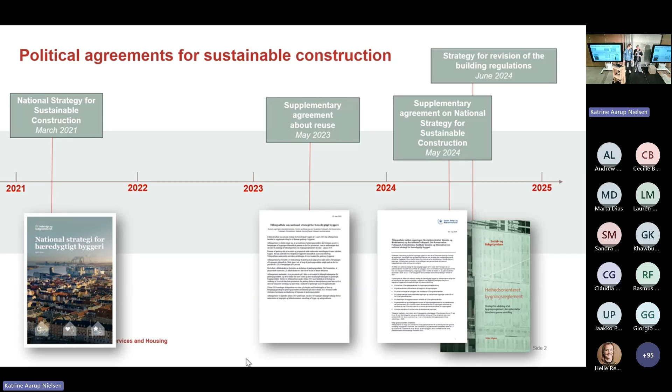So we will take a deep dive into this supplementary agreement from 2024, and Mads will start. As Nana said, we had these initiatives both for new construction and for renovation, and I will present this for the new construction, which is mainly our LCA requirements.

The agreement added a tightening of the limit values. In the first strategy, there was some stepwise tightening of the limit values, but a political agreement made the limit values even tighter than what was expected in 2025, with stepwise tightening further in 2027 and 2029.

This agreement also added a differentiated limit value based on which building typology you have. First, it was for buildings over 1,000 square meters. Now we have single-family houses, office buildings, and residential buildings - it's divided into different building types now.

Then we also added the construction process, and we have expanded the scope of buildings. Before, it was all buildings that need to fulfill the energy requirements, that need to make documentation for their climate footprint, and buildings over 1,000 square meters had a limit value.

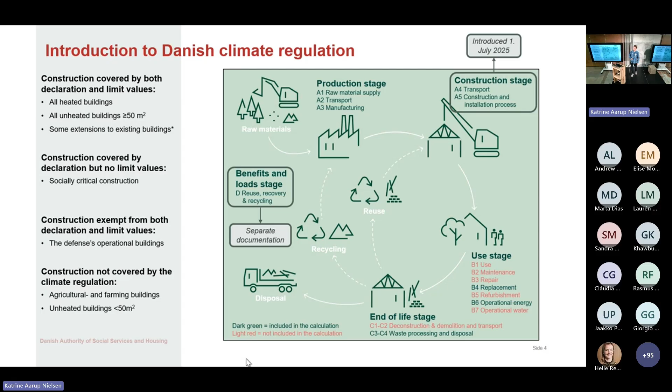This is the limit values as they look today. We have an average limit value of 7.1 throughout all building types, and you can see them divided by building type.

Then we have the construction process with a limit value of 1.5 for the construction process itself. So that's divided into two different limit values: one for the building and that process, and one for the construction process itself.

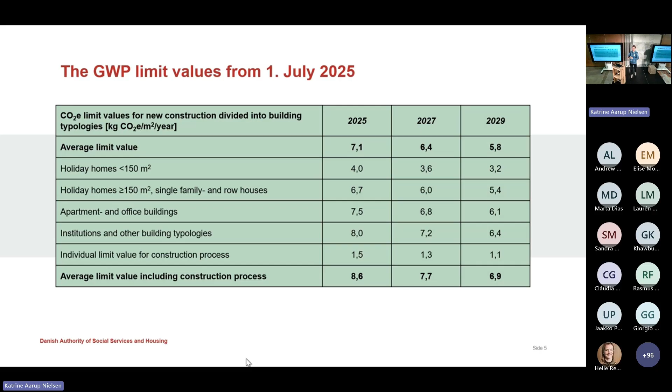Then a bit about digitalization. We have made a mapping of some classification systems mainly used in Denmark to make it easier to compare building models between programs or software used for modeling and what the requirements are in the building model.

Then we have a project that made an exchange format called LCAX, which makes it possible to convert a calculation from one tool to another and compare calculations from different tools against each other. So you can have one project calculated with one tool and another project with another tool, and then compare the calculations and the different elements in the building.

Then we have a voluntary standard for handing in the calculation in Excel, so you can fulfill that. Some tools have it included, so when making your calculation in a tool, you can just export the results in this format, but it's still voluntary today.

Then hopefully we will soon get the first steps of an analysis looking at IT architecture, how to hand in your calculation and how to store the data and analyze it afterwards.

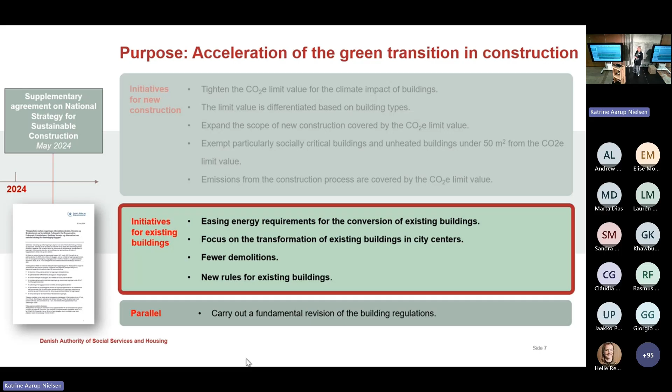There should be a focus on promoting the transformation of existing buildings in city centers so more housing can be created there, that it should be investigated how demolitions can be avoided, and that new rules must be developed to make it easier to utilize existing buildings when rebuilding, renovating, and changing their use. These new rules must be able to be applied instead of the rules that apply to new construction. This is one of the major focuses of the political agreement.

Parallel to all of this, there is this fundamental revision of the building regulations throughout the whole, quite big package that we have developed in Denmark.

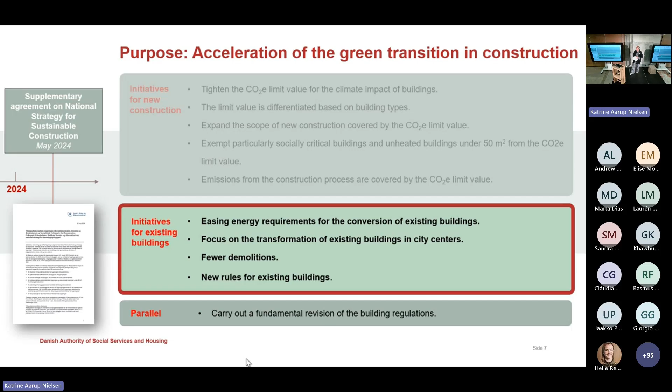With a greater focus on promoting the use of existing buildings, it makes sense to take a closer look at how we can ensure fewer demolitions in the future. At present, no legislation in Denmark grants authority to preserve a building based on climate or resource considerations.

With this project we are currently working on, we are investigating whether a new assessment system can be established where the municipality can reject an application for demolition when objective considerations make it appropriate to preserve the building. Furthermore, we are investigating if it's possible to introduce some kind of demolition fee, something corresponding to the environmental and climate impact that demolition may cause.

This is work in progress and an ongoing project that is both very exciting but also very demanding and difficult, also due to demographic changes and differences throughout Denmark. But the results are to be presented for political discussion in mid-26.

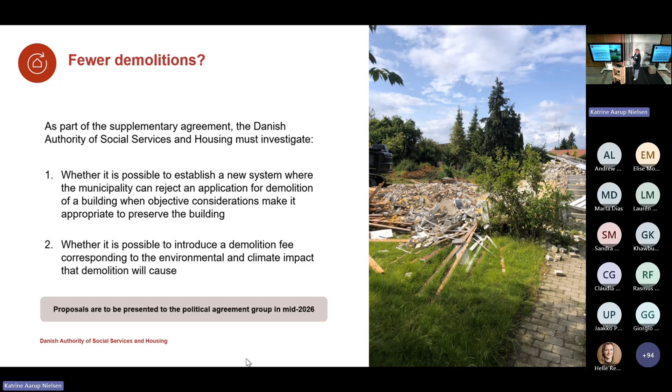Fewer demolitions talks for more renovation. This is two sides of the same coin, and because there is a focus on promoting renovation rather than demolition and new construction, as I said earlier, new rules must be developed to make it easier to use and utilize the building stock.

Before new rules can be implemented, the current rules must first be clarified. We have made a thorough analysis on how the industry experiences challenges, where they actually face big hindrances and barriers in the requirements. We have realized that there is a lot of confusion among the industry and actors about what the requirements to renovation actually are.

Many interpret the rules more restrictively than they actually are. So we are now working on clarifying the current rules so that it's clear what requirement, when and which requirements apply in renovation. We work specifically with renovation definitions to ensure coherence across the technical chapters, and to make sure that we talk about the same steps in a renovation.

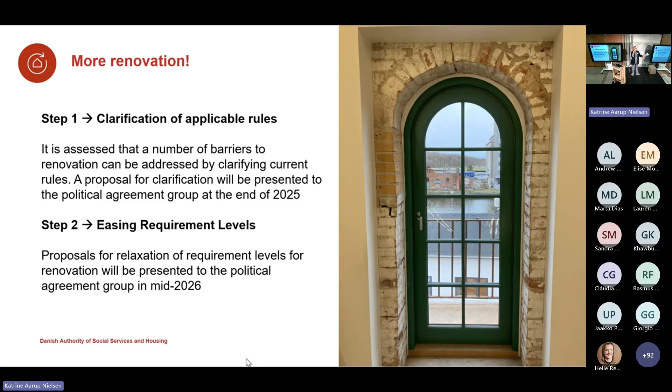This is quite an accelerating time for us, and methods and principles are to be developed at the beginning of 2026. As with the proposal for how we deal with demolitions, by mid-26 the politicians must be met with some kind of, I hope, big, beautiful catalog that we can give them.

That is actually what we have for you today. Both Mads and I will be here all day, and we look forward to more discussions when we join the table discussions. Thank you.

Thank you very much, both to Nana and Mads, for a very interesting presentation. So you can hear a lot of things are happening in the political system, next summer is very soon. So thank you very much for sharing this.

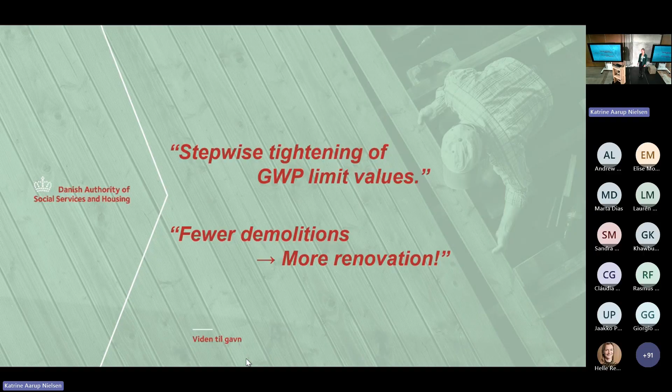We now have the last presentation from the Nordic construction authorities, and then there will be time for a few questions, and then we sum up for this part of the morning session. So the one I will now invite on stage is Elin from the Icelandic Authority of Construction and Housing, who's been working in the Nordics for a longer time, and has a lot of really interesting new information from Iceland. Please, the floor is yours.

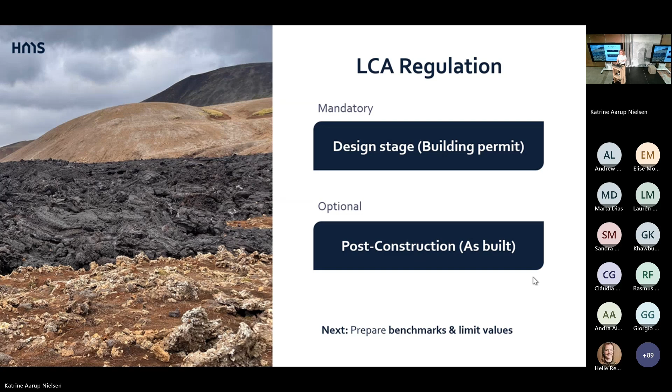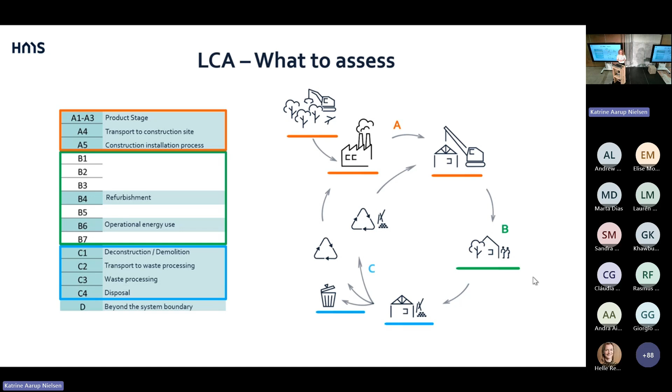In broad terms, the LCA required by the building regulation must cover the major life cycle phases: product stage, transport to site, construction processes, replacement over the life cycle, energy use in operation, and end of life. The assessment must include the main building elements, systems, and technical equipment. This provides a full view of whole life carbon beyond upfront emissions.

To encourage the circular economy, reused materials are recorded with zero carbon across the assessed phases. The aim is to shift choices toward existing stock and secondary materials wherever quality and safety allow.

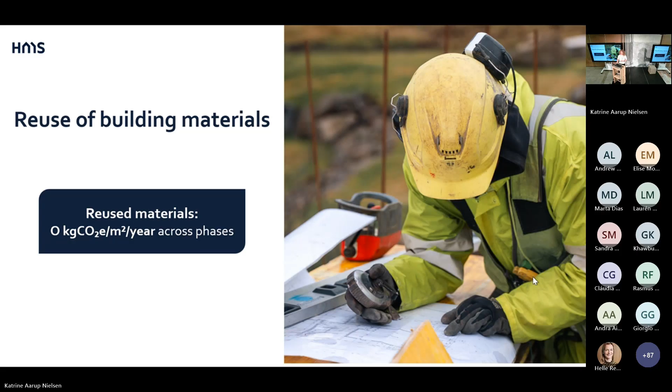When project-specific data or EPDs aren't available, we provide Icelandic average values for the main phases. All background data must be traceable to its source database, and we encourage the use of Icelandic-specific data and product EPDs whenever possible. If generic data are used, we accept recognized Nordic databases for common materials, clearly documented in the submission.

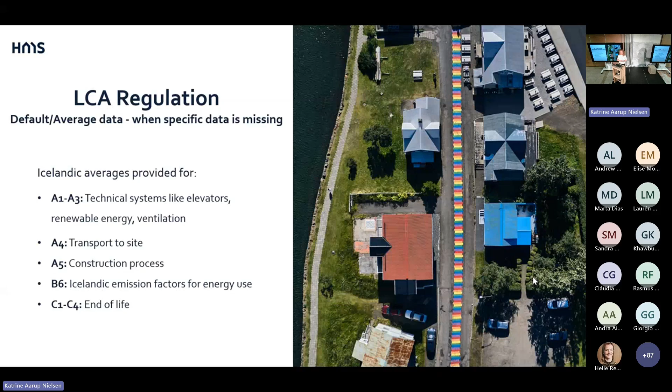All LCAs in Iceland are submitted electronically via the HMS LCA portal with structured fields, basic validations, and an upload of the results file. Applicants must provide building metadata, the type, the size, the extent, the LCA software used, and phase-by-phase results.

Next step is to link the LCA submission with the National Building Registry, so there will be just one central entry for all building applications and a persistent lifecycle record from design to demolition. We consider that an essential step toward full traceability and better analytics.

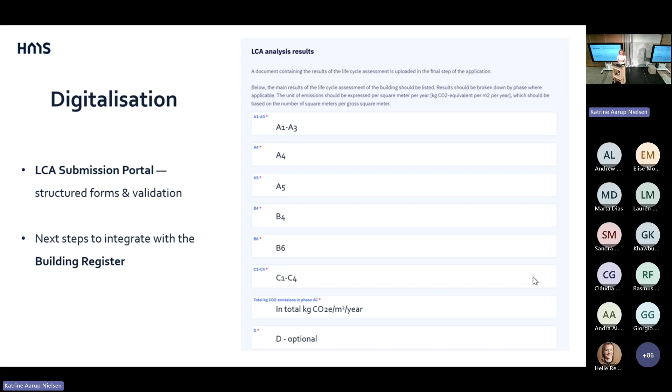The Icelandic Construction Roadmap, a joint program of government and industry, includes a new action set to begin shortly to make better use of existing square meters or existing floor area, both in today's stock and in new projects.

We want to promote flexible design and establish clear pathways for change of use, and the work is set to identify what municipalities need to run cases consistently: practical guidance, checklists, and a simple process flow.

for change of use applications. We will also map regulatory and process barriers, distinguishing quick wins from topics that need broader reform.

Partners with HMS in this project are, among others, the Green Building Council in Iceland, the City of Reykjavik, and the Icelandic Association of Local Authorities.

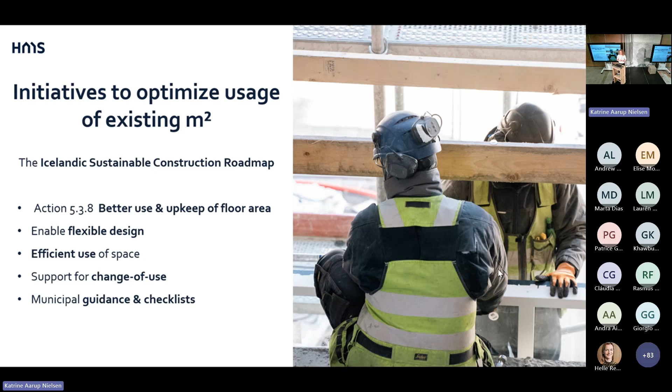The outcome here is set to be more adaptable buildings, fewer demolitions, and faster delivery of needed uses, especially housing, while reducing the whole life carbon.

Another project, one of Iceland's priorities, is to get more from the buildings we already have. Our aim is to cut emissions while delivering homes by favoring the use of existing floor area over demolitions and new build.

We are focusing on underused commercial and industrial buildings that can reach residential quality with targeted upgrades. To make this practical, we are preparing guidance for municipalities to map areas that are currently zoned for commercial or industrial use but show credible potential for housing.

Locations with strong access to service and transport, feasible daylight and acoustic performance, and of course sufficient structural capacity to meet residential standards.

In parallel, we are providing, or will provide, concise guidance, checklists, and standard documentation so that case handling for change of use becomes consistent and predictable across the municipalities.

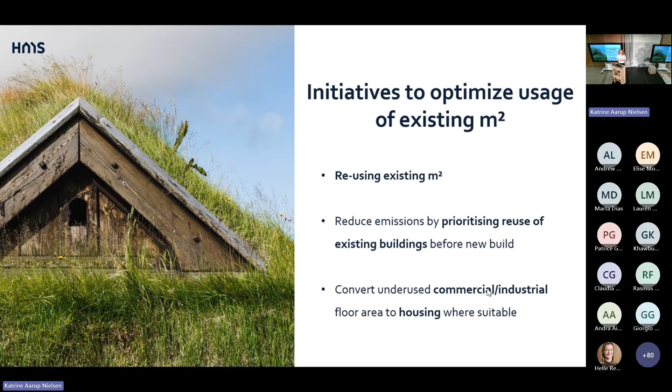The benefits here are clear: lower upfront global warming potential by avoiding demolitions and new materials, shorter delivery times because core structures and utilities are already in place, and better use of existing infrastructure, all while safeguarding quality and safety. Thank you.